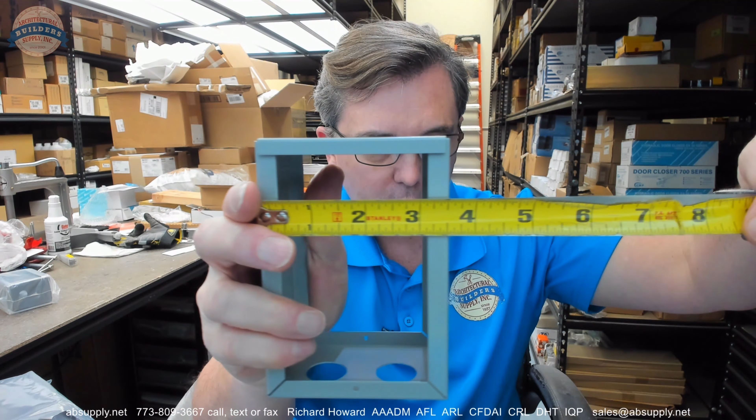A standard control box like this, mounting box like this, is going to be very typical and common. One knockout, two knockouts. Overall width about 3 9/16, overall height about 5 1/16.

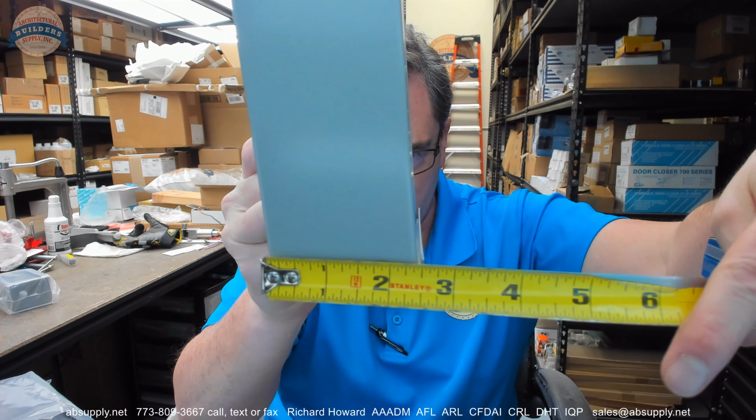The depth without the mounting plates, I think I've got that upside down. The depth without the mounting plates could actually be closer down here, about 2.5 maybe. Okay, a couple of covers, not mounting plates.

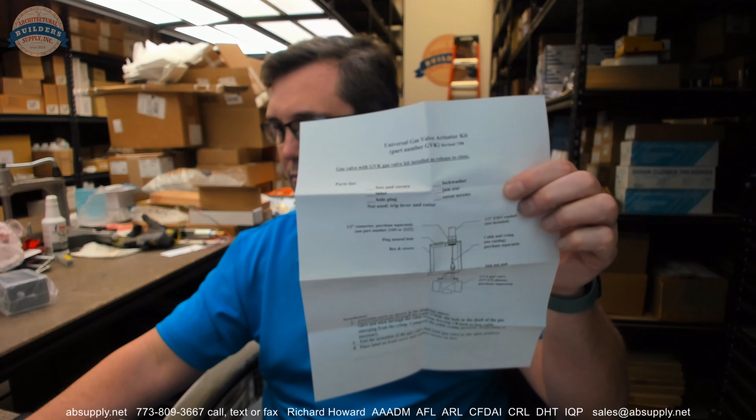Covers are indeed included, along with some paperwork and a decal. The installation instructions are linked down below, and they are indeed the document that is included. We'll take a look at that in a moment.

Automatic gas shutoff valve, okay, that's a decal. You have your two plates, about 3 7/16 by about 4 31/32 or thereabouts.

You're going to have your hardware package that's here as well. Let's take a look at that. Box and covers, lock washer, your cotter pin, your hole plug, your trip lever, your jam nut, your label, and your cover screws.

That's all at the top of page 2, and that does include all of the parts other than the installation instructions that are here. So let's switch to the screen view so we can take a look at those installation instructions.

So this is the item that we are looking at here, and we have our fits-all GVA gas valves, release-to-close and trip-to-close option. Installation instructions are here. We can fire that up.

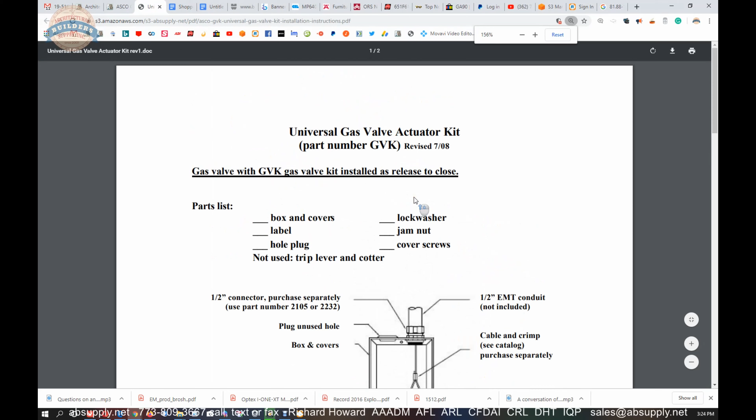Gas valve parts list, that's what I just read. Actually, the parts list is on both pages. And here's what we're going to look like.

We're obviously dealing with the metal structure. Okay, you're going to have potentially an unused hole, box and covers. The 1/2-inch connector is not included, nor is the EMT. Cable and crimp is not included in this.

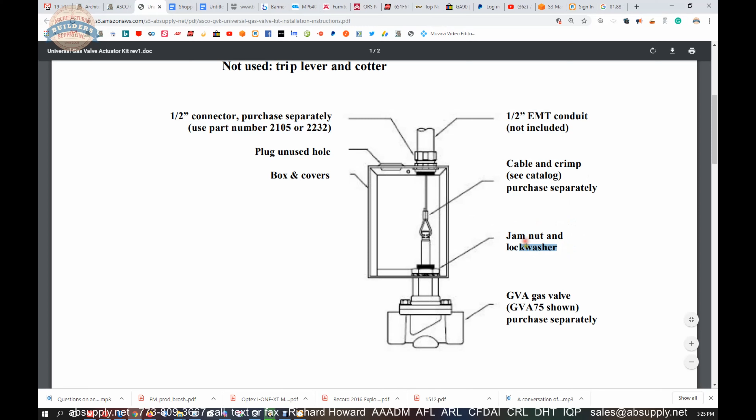Basically, it's this hookup box. Your jam nut and lock washer are included, and your gas valve itself is, of course, not included. Steps for installation, I think, are pretty clear in the unit itself.

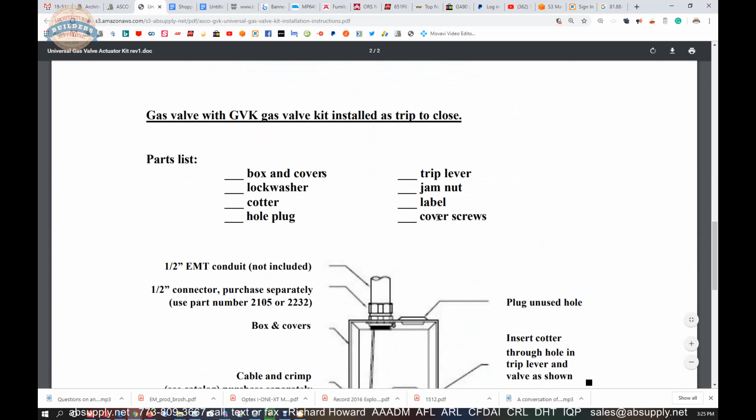And page 2 shows you elegantly how the trip lever is installed. That cotter pin, of course, is going to work with the trip lever, and then, of course, the positioning is going to be based on the size of the gas valve that you have, where you're going to position that. We've sold all these sizes of gas valves.

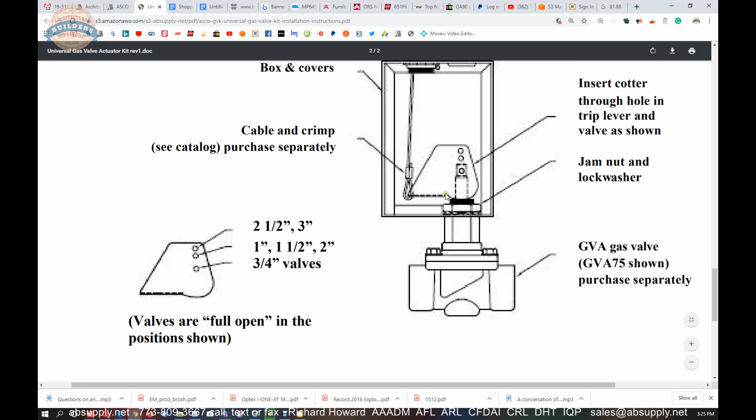I believe that it's a little out of scale here because some of these gas valves are not small, but nonetheless, that's what it looks like.

All right, let's finish up this video on camera, but before we do so, let's get to the item that we were looking at.